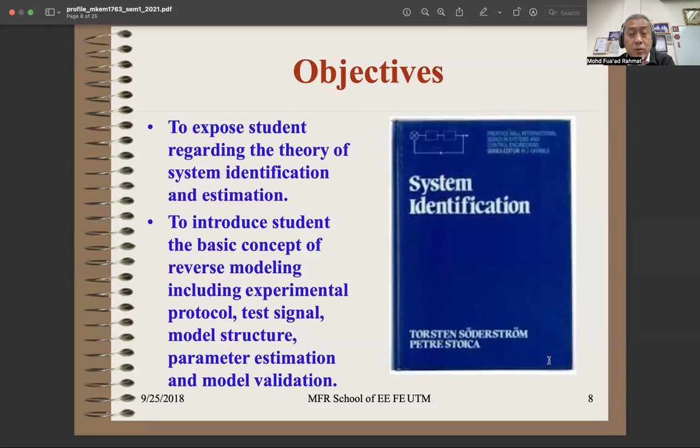So this is the way I conduct my lecture. I switch between my laptop in Zoom and then go to the iPad for the whiteboard. Okay, then I will share some MATLAB programming. So I hope you install MATLAB software in your laptop.

So the synopsis consists of technique of SystemId, technique of parameter estimation, acquiring data, and then pre-processing data. Then we have non-parametric model technique, then parametric model technique, and then analyze, validate the model, and then convert to the system model, and then we have a case study. Because SystemId must have a case study. So I will discuss some case study in the class. So just 4 of us, so should be no problem.

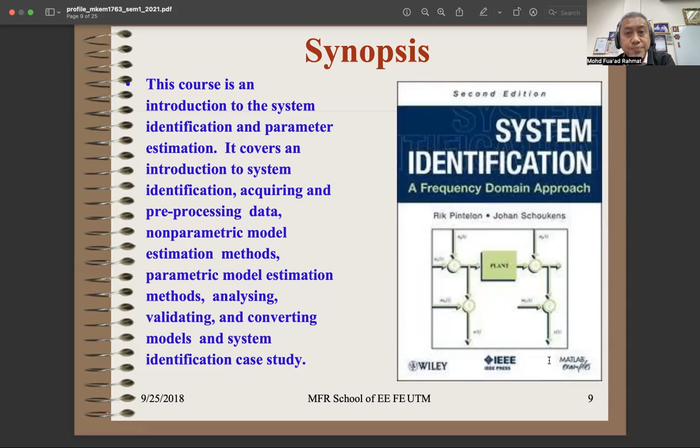So in order to do this subject, you need a deep understanding of control system, which is the modeling and analysis, and then control system design and the modern control theory for the state space representations, based on the theoretical base and practical implementations.

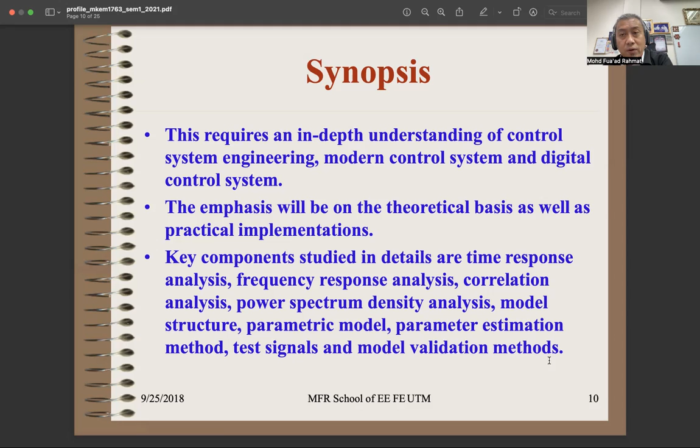Okay, so the key components: time and frequency response analysis, correlations, power spectrum, model structure, parametric model, non-parametric model, estimations of the parameter or coefficient values, test signals, and some model validation methods to verify the model whether it is acceptable or not acceptable.

So for MKEM, we have a PEO, Program Educational Objective. This one is not included in the final exam, just to inform you what is the target after you graduate your master's, to produce a postgraduate with multidisciplinary knowledge in designing, integrating, optimizing modern control and mechatronics systems.

And then to produce a postgraduate who is able to generate new knowledge, ideas and techniques in control and mechatronics, and to produce a postgraduate that is prepared for R&D, research and development, and innovative industrial ventures. And then to produce postgraduates who are able to consistently perform their responsibility ethically and professionally. This number 4 is a very tough one. It's about ethics, attitude.

So for the PLO, we have 6 PLOs. So basically our subject has PLO1, PLO2, and then design PLO3. And usually 4 to 6 is the soft skills. 1 to 3 is the technical skills, and 4 to 6 is the soft skills.

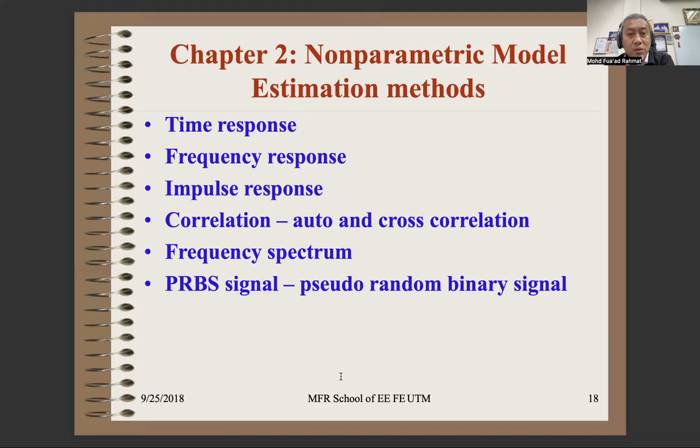So this is chapter 1, the content of chapter 1. Introduction of System ID, some of the subtopics. Chapter 2 on the nonparametric model estimation method. Chapter 3 on the parametric model method. Chapter 4, semester break. Then we have parametric model estimations. Then chapter 5 is the case study.

Okay, there is a link here. It is a link from the internet for the data provided by the university for homework and assignments of the subject. I think this one is another university. I just share the link.

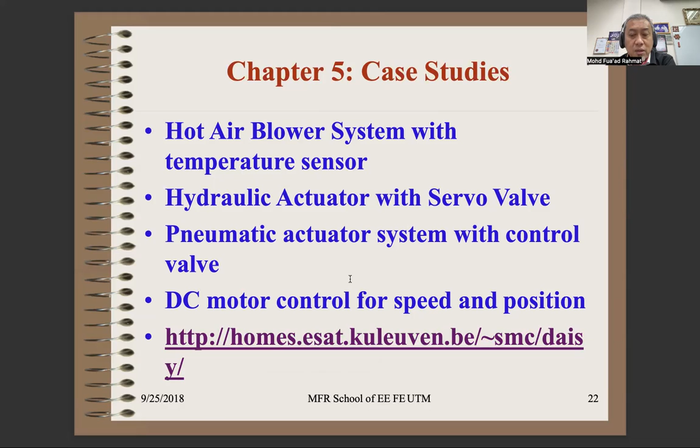So learning resources, I prefer this book, Arun K. Tangirala, which is Principles of System Identification, Theory and Practice. So I have the book with me. This one. Can you see the book? I will not follow all. I just take a little bit from there and share with you. So if I say you read this book chapter, you have to read lah, to get some information from that particular book.

And then the second book, this one is by the guru of System ID, Professor Lennart Ljung, System Identification: Theory for the User, second edition. This book is quite advanced. You need a very deep understanding of mathematics. And then other gurus of System ID are Söderström and Stoica.

Okay, all in my website, where I put all the books, so you can read the ebooks on your own. It's free of charge. And this one is other, so you can use it as an added reference. Right, so that is the end of my preamble.

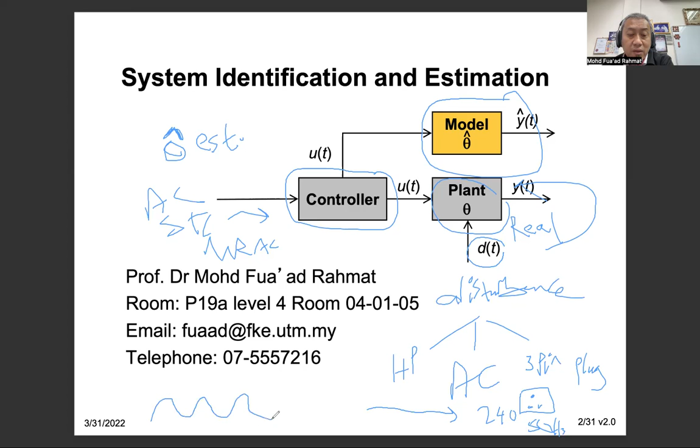220. In Malaysia it is 240 AC, 50 hertz. So it has a 50 hertz sine wave, and this can enter the plant as a disturbance. Okay.

So system ID involves a lot of applications from 4 broad fields in engineering, mathematics, and statistics. Okay, so it will communicate with the system and sampling theory, theory of random process because of the uncertainty, signal processing, and estimation theory. Okay, so it will support the system ID theory. And the 4 fields here are sometimes being used in order to get the best model from the data.

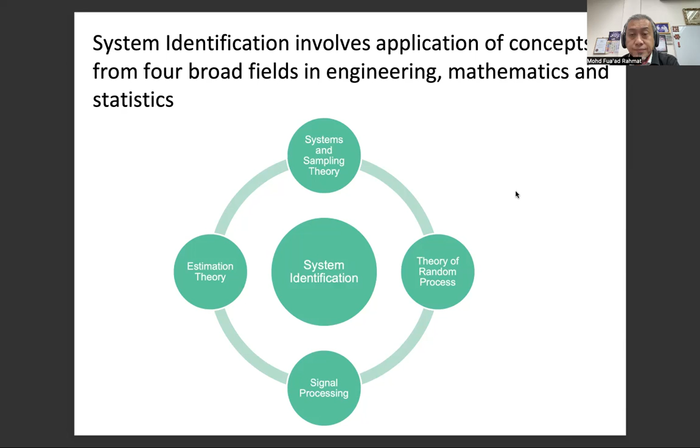And to be more specific, it involves recursive parameter estimation, model selection, self-tuning control, MATLAB and Simulink, statistics, ordinary differential, difference equation, linear algebra, linear modeling, least square estimation, and so on. So for the elements of the course, we have 5 main elements, basically the intro, and then non-parametric and parametric modeling, and then least square and recursive parameter estimation, model selection, and case study.

For system ID, we can do it online and offline. Okay, so online means we stay in the lab with our computer, with our unknown plant, with our data logger system. When we capture the data, the data captured will be processed online using the algorithm, either in MATLAB or in computer programming, and produce the plant at that particular time. That we call online.

But it can also be performed offline, where you run the experiment, then you capture the data, then you save the data in the pen drive or Google Drive, and then you go back to your hostel, to your house, you have your dinner, you take your bath, you play any sports, badminton, and so on. Then after that, about 10 p.m., you open your computer and process the data that you captured in the morning or in the afternoon in the laboratory. So that one, we call offline analysis, okay?

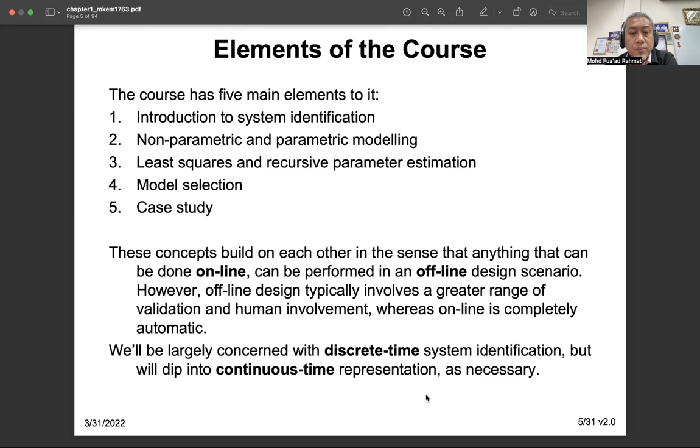In order to get the data in digital form, and then you plot. So both are the same actually. You can do discrete or you can do continuous time. So if you are using discrete, the important thing is you must know what the sampling time is. So that matters. Sampling time is very critical if you are using discrete time compared to continuous time.

So the definition of system ID is building mathematical models of dynamic systems based on a set of measured stimulus and response data samples. Okay, so it applies in a lot of disciplines: mechanical engineering, biology, physiology, meteorology, economics, and model-based control design. So usually we are focusing on model-based control design. We get the model, then we design the controller and design the system.

But don't forget that it also applies in biology, to predict the ecosystem, physiology, to predict the human cycle, and meteorology. This one is very important to predict the rain, the wind, the hot weather, especially flooding. So if there is a flood, heavy rain, that is very important. That data comes from the meteorology office, and they will issue a warning via social media so that people will be aware and take note of it.

And then economics, usually on import and export. So buying and selling. They predict the value of the RM compared to the US dollar. So these are all taken into the economics discipline. Okay, so for engineers, we are using model-based control design.

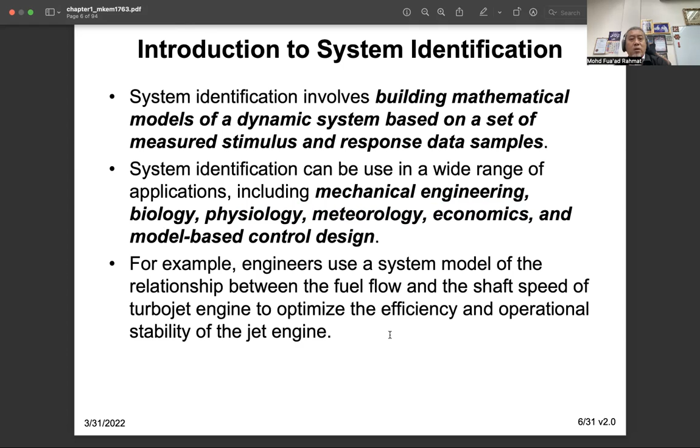Some biologists and physiologists use SystemId, for example, to estimate the eye pupil response and heart rate control, which is a biological system. And then meteorologists and economists build mathematical models based on historical data or time series. Why? Because they want to forecast, to predict, to estimate.

Sometimes the forecast is not true, but it's just a forecast. The forecast is not true because they don't have any input data. The difference is they just have data, then they forecast. Compared to our field, where we are using model-based control design, we must have input. We call it the cause. And then we must have output. So output is the effect.

In model-based design, you must have this. Either we use the square wave, or impulse as a test input signal, or PRBS, which we will learn later. And then there is also disturbance, of course. So we have to measure the disturbance in terms of the signal to noise ratio. So you have the signals, I share there.

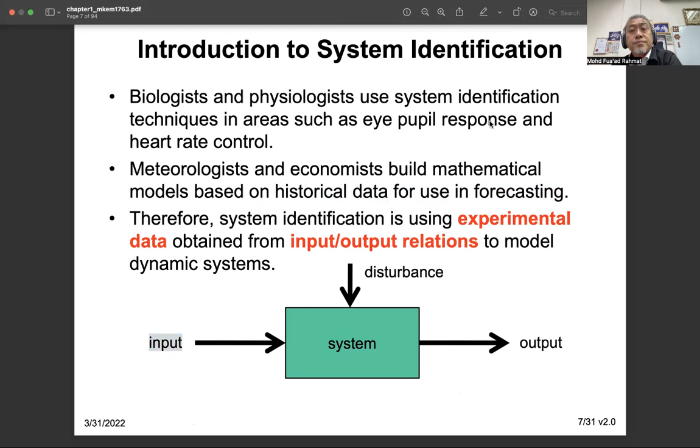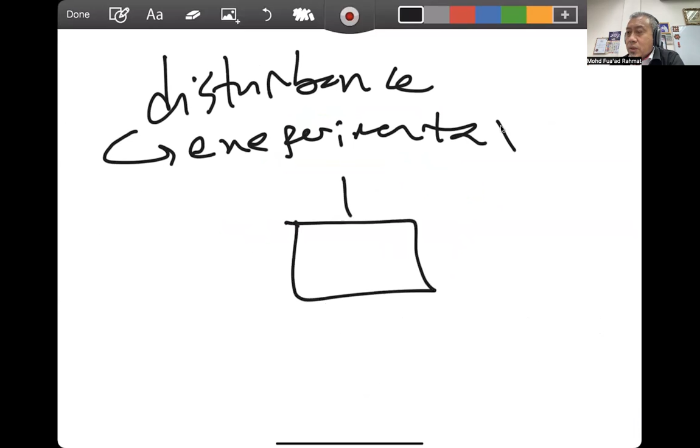Disturbance. You cannot avoid disturbance because once you do an experiment to collect data, it will come automatically. Whether you like it or not, it will come. And the source comes from, as in the previous talk just now, the handphone, the aircon, the 3-pin plug, and so on. It will enter your system. Here, disturbance, to the unknown system. So it will enter here.

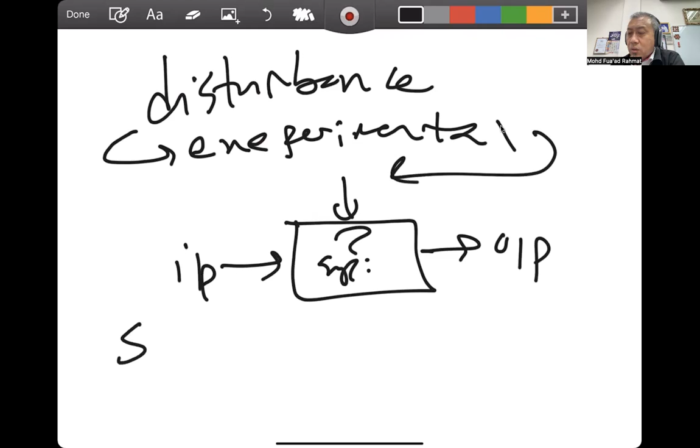And then we have to see the signal to noise ratio, signal versus noise. So noise is here. This is noise. And this is the signal that we get, the output. So you have SNR high, SNR low. If the SNR is high, it is good, because the noise is small. But if the SNR is low, it's not good, because the noise is high. So high SNR is our choice.

When we have a high signal to noise ratio, it means that we can ignore the noise, just a little, very small noise, we can ignore it because it doesn't affect. But if the noise is very big in amplitude, it will affect the signals, so the SNR becomes not good. So we don't want that kind of measurement in our data.

So SystemId is step-by-step. The initial step is to identify a model of the plant and then get the model-based control design, and it is an iterative process. Iterative process means that we have a loop, whether the model is accepted or not. If accepted, you get the final model. But if the model is not accepted, below 90% best fit, you have to repeat the process again. So it's iterative until you get the final model.

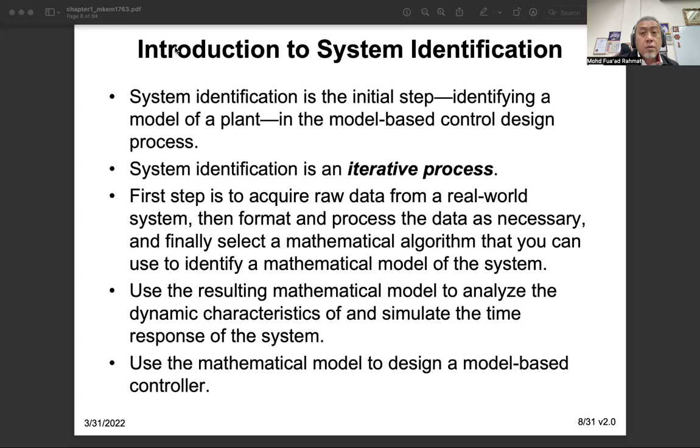Some of the books by Lotfi Zadeh, he's Iranian but stays in the US, refer to the problem of determining the input-output relations of a black box, or modeling based on observed experimental data. Zadeh said that the unknown system is a black box system. If you have a black box, you don't know what's inside it. What is the circuit? How many filters? How many amplifiers, capacitances, resistances, inductances inside the black box? You simply don't know.

That's why SystemId is the process of determining, through practical testing, the transfer function or some equivalent mathematical description. Usually it is the transfer function, because the transfer function can inform us how many poles, how many zeros, whether it is stable or not, faster or not. That represents the dynamic characteristics of the system components. Why do we need this model?

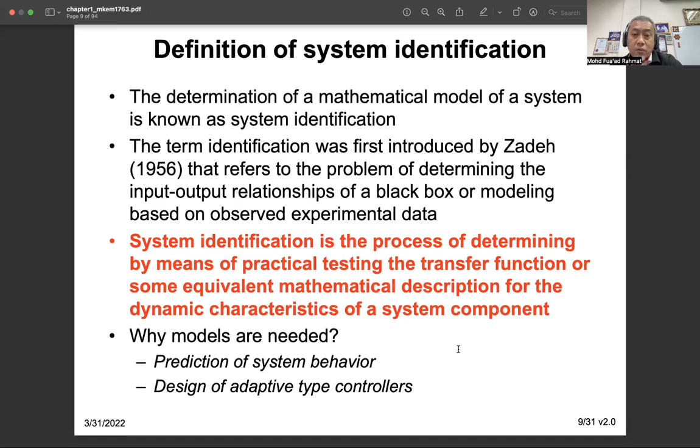Of course, in model-based control design, we want to design a controller. If you want to design a controller, you must get the exact model first, at least a model with 90% best fit. The estimated model follows the real model, best fit above 90%. So when the models are ready, we can predict the system behavior, and then we can design several types of controllers, either PID, adaptive, self-tuning, and so on.

So this is what we talked about just now. It's a task of using input-output data to build a model, which is the abstract of the process. It reflects the content of the black box. So we have the input, which is the probe signal. We have the output, which is the observed response, and this will go to the data acquisition system or data logger system, and from there we use the calculations to estimate the coefficients, and finally we get the mathematical model.

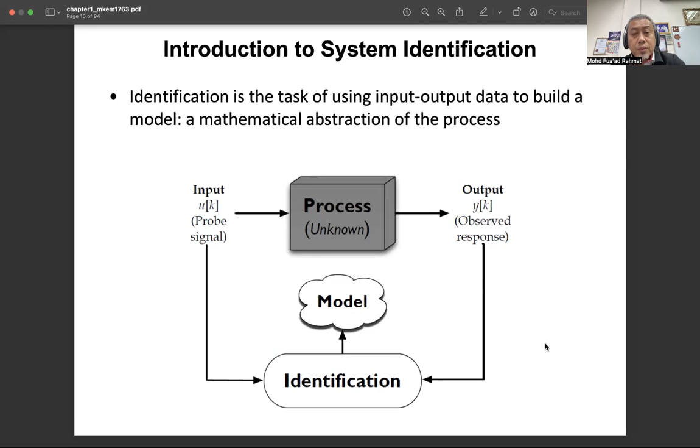So some books define SystemId as the methodology of building mathematical models based on input and output signals. It has several steps required, which is the measurement. So you must have a sensor. You must have a data acquisition system or data logger system to capture the input and output data. If there is no data, there is no SystemId. There is no data-driven modeling.

After you get that, you must choose the suitable model structure for the system. Is the model linear? Is it non-linear? What is the order of the system? Is it first order, second order, third order, or higher order? So you must choose the suitable model structure that can fit the unknown model.

And after you fix the model structure, you can apply the estimation method. There are many estimation methods. If you search on Google, you can see a lot of estimation methods listed in many journals to estimate the value of the adjustable parameters. And then you evaluate. Evaluate means you validate the model. Is it accepted or not? Does it give a small error? A big error is not acceptable. So the error must be as small as possible.

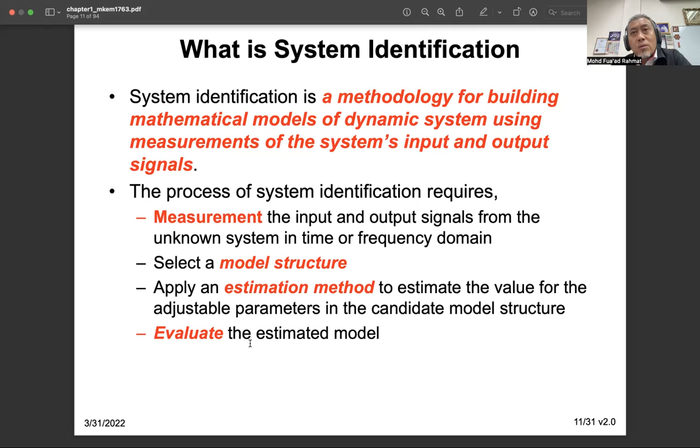So some of the definitions of SI: the objective of SI is to obtain a parsimonious model that adequately represents the system. What is parsimonious? Maybe it is a word that is new to you. A parsimonious model is a model with as few parameters as possible for a given quality of the model. So this is the best, few parameters, not complicated.

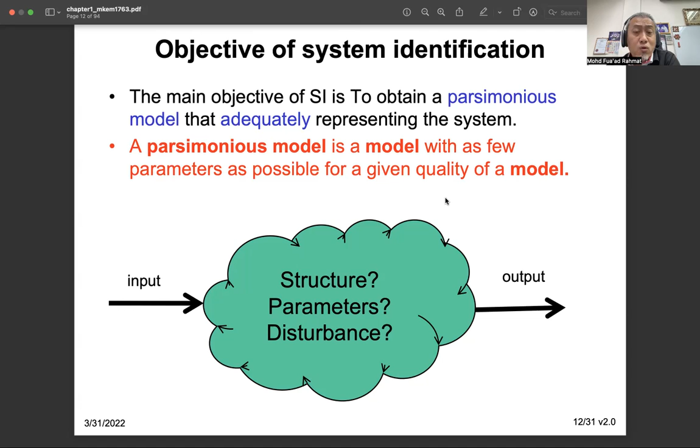Nevin, puasa tak? Nevin, pernah puasa? Tak pernah, Prof. Cubalah. You can feel that your body feels very light. Your stomach will rest for 1 month. Rehat pada siang, tapi malam boleh makan lah after sunset. It's good for the health actually.